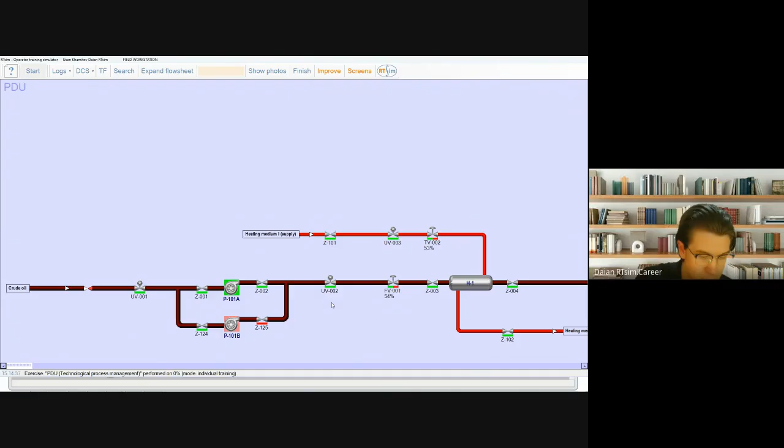On the main screen, the primary distillation unit, and the technological process management mode. As I said, in this simulator it's better to arrange these elements in a vertical direction. You can see that this simulator is really huge.

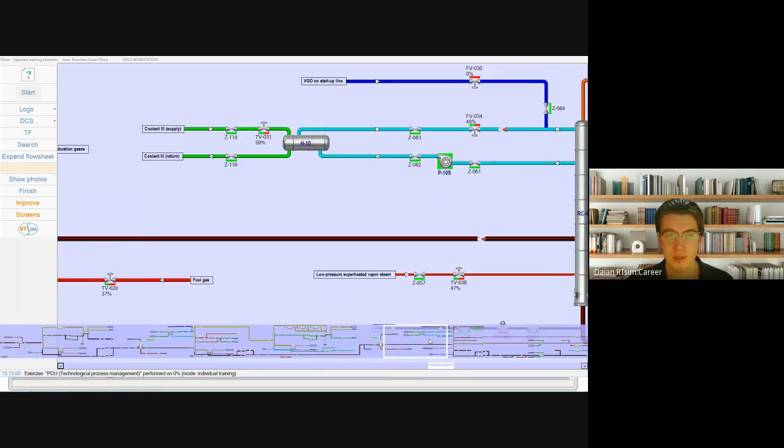This primary distillation unit is the first step of refining crude oil. The primary distillation unit is a facility for primary crude oil processing in oil refineries. It's commonly referred to as an atmospheric vacuum distillation unit with an electric desalting and dehydration block.

Why is it needed? This unit removes salts and water from crude oil and separates crude oil into fractions for further processing or for use as components in commercial production, and it's designed with several blocks.

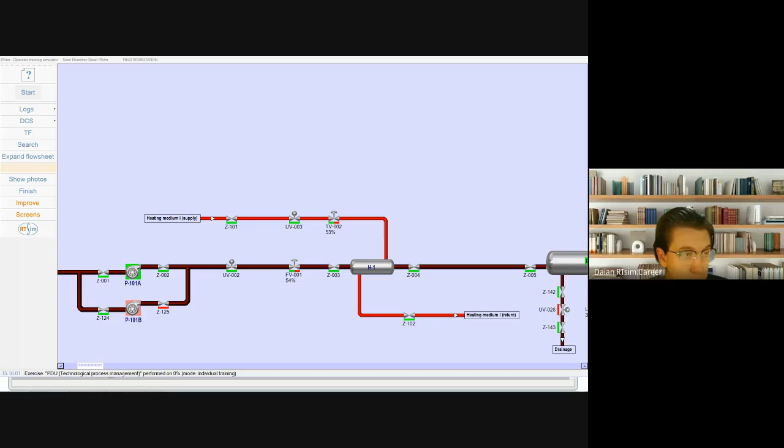Electric desalting unit, electric dehydrator, crude stabilization unit, rectification column, and vacuum distillation unit, furnaces, and the vacuum distillation unit. You can also see here a new type of refining unit: furnaces.

About this simulator: annual production is 1 million tons of crude oil. Daily production is about 3,000 tons per day, and hourly production is about 100 tons per hour.

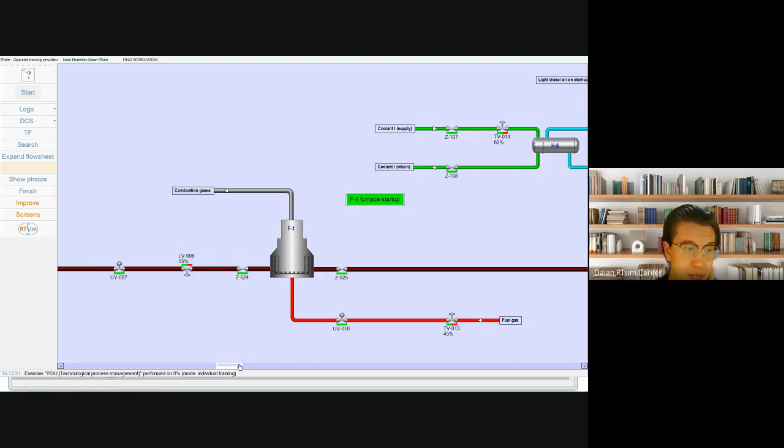What processes occur? Preheating of crude oil in a heat exchanger, crude oil stabilization, light ends removal, and main heating of stabilized crude oil in a fired heater, then atmospheric and vacuum distillation of crude oil, and obtaining key products: light product, heavy product, and heavy diesel oil, tar, and oil to recycle stream.

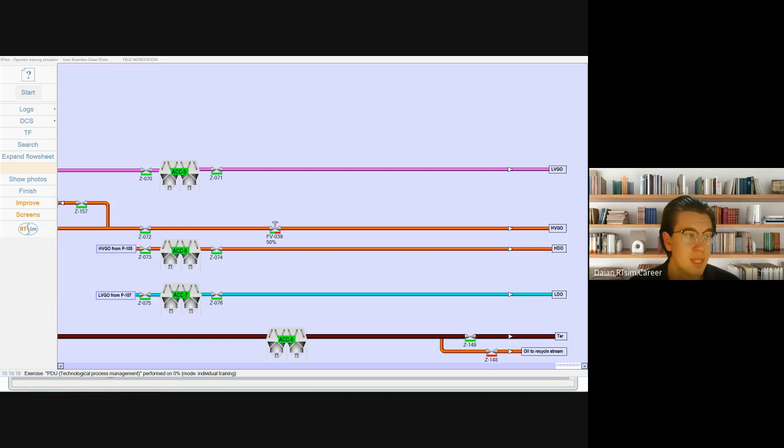Condensation and cooling of distillation product: crude oil is a complex mixture of hydrocarbons with different boiling points, and fractionation is a physical separation process that does not alter the chemical composition of the hydrocarbons. It consists of two main stages. First, crude oil is heated in heat exchangers and a fired heater, then fed to the atmospheric column, where it is separated by rectification, multiple stages of evaporation and condensation.

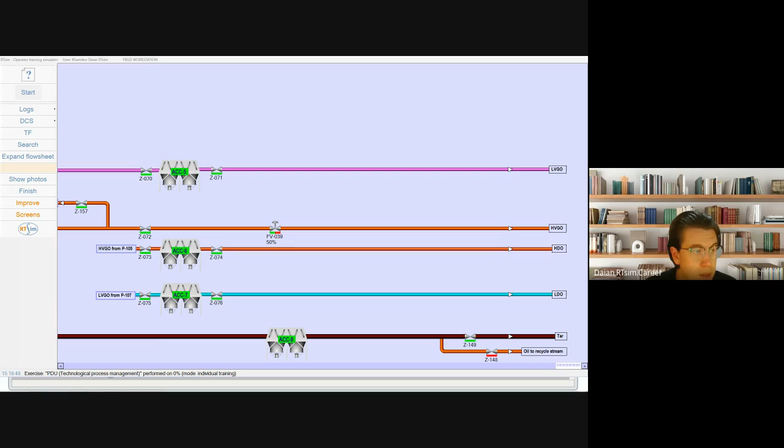Crude is heated in a heat exchanger and fired heater, then fed to the atmospheric column, where it is separated by rectification, multiple stages of evaporation and condensation, into fuel distillates such as gasoline, kerosene, diesel fuel, and atmospheric residue. The atmospheric residue is further processed in the vacuum column; pressure reduction is required to lower the boiling points of heavy components and to prevent thermal cracking of heavy hydrocarbons. This allows production of vacuum distillates, heavy diesel fuel, light and heavy vacuum gas oil, and ensures vacuum residue like bitumen. Thus the process ensures sequential separation of crude oil into target fractions through controlled adjustment of temperature and pressure.

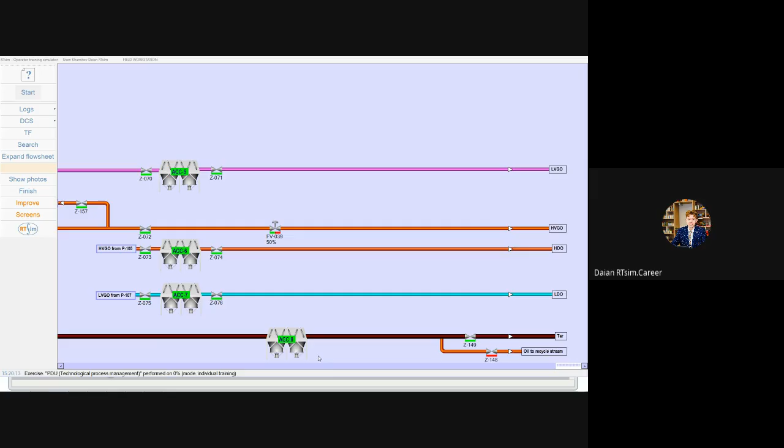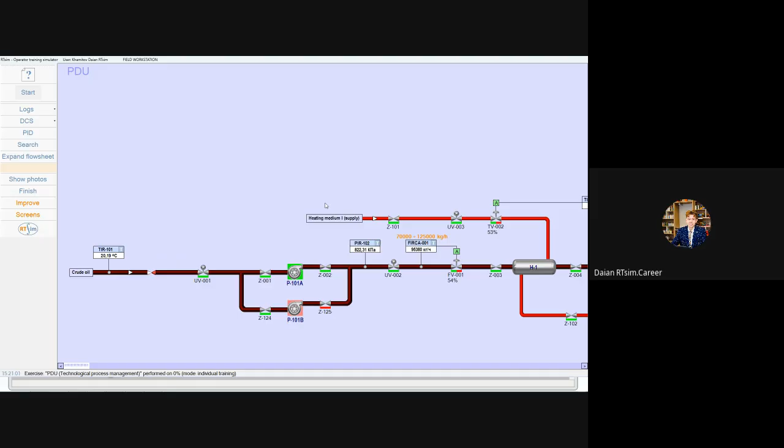Crude temperature and pressure at the pump discharge are recorded by instruments. To see all devices, click on TF mode, and you see that TIR-101 and PIR-102 are temperature and pressure devices that measure the parameters of crude oil. Crude mass flow rate is maintained by controller FIRCA-001 and control valve FV-001.

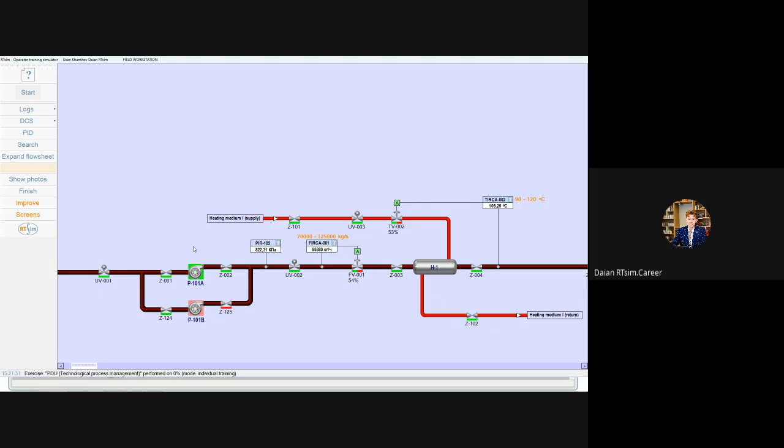After crude oil is heated in the heat exchanger, it is directed to the electrodehydrator, which is designed to remove water and salts from crude oil. Heated crude temperature is maintained by controller TIRCA-002 and the level device.

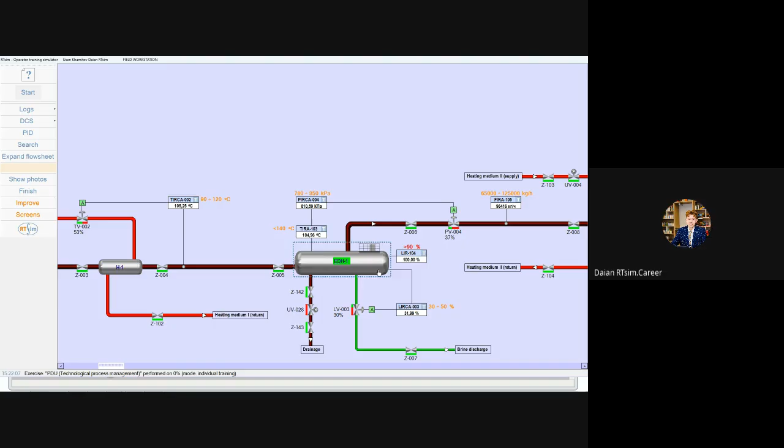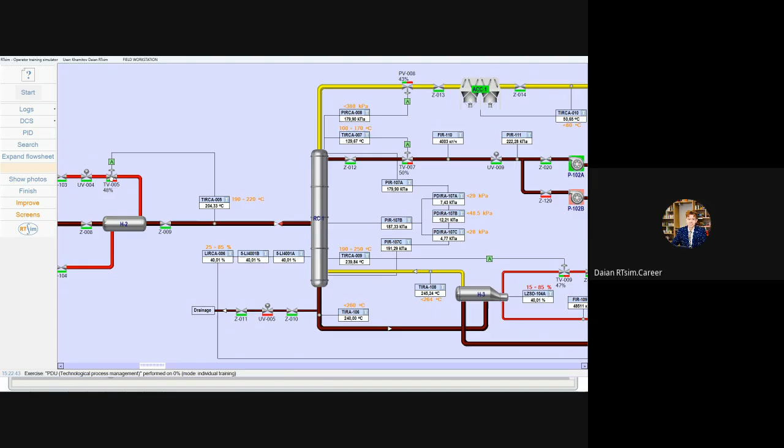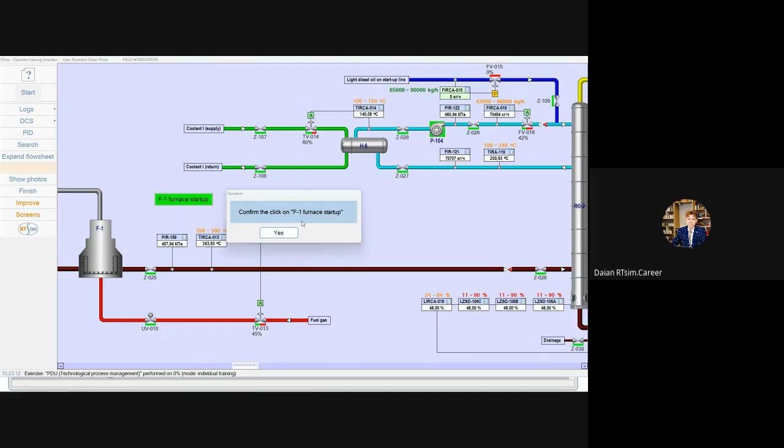The next unit is the crude stabilization unit after the second heat exchanger. Dehydrated and desalted crude oil passes through and is heated in a heat exchanger, the second heat exchanger, where temperature is maintained by controller TIRCA-005 and control valve TV-005.

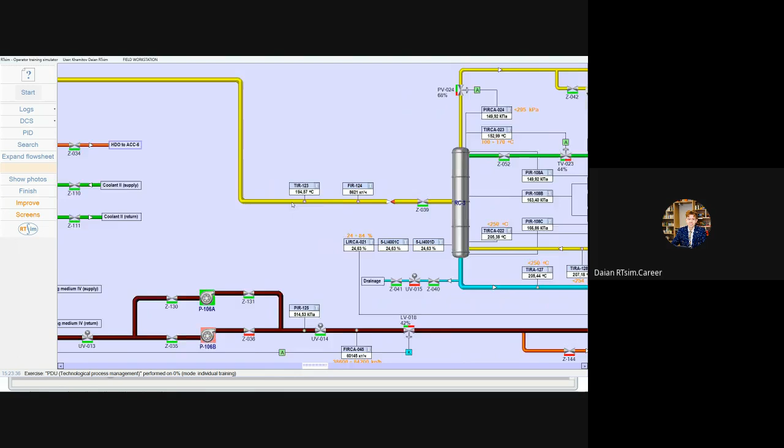Now let's get back to the first rectification column. After two heat exchangers and the electric dehydrator, crude oil is directed to the seventh feeding tray. All signalizing parameters you can see here.

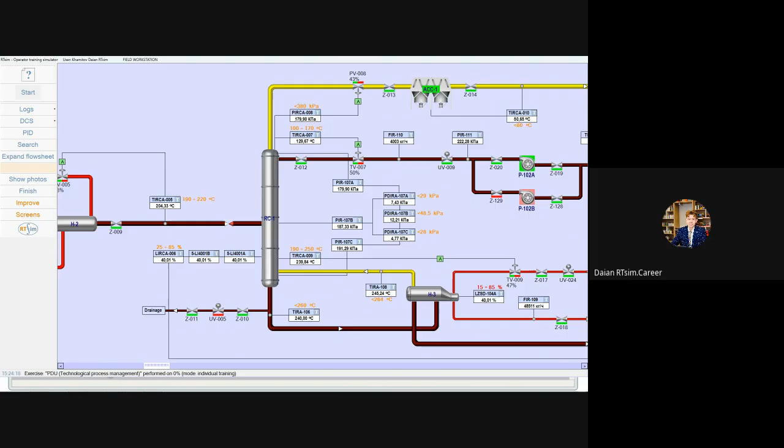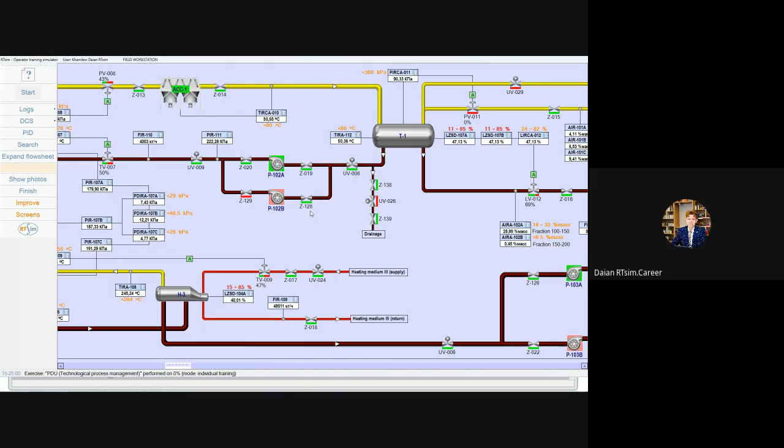Next block is the atmospheric distillation block. Stabilized crude passes through, is heated, and goes from the first rectification column to the second one. In the second column, which is bigger, the feeding tray is the seventh tray.

The first rectification column has differential pressure monitoring in the column. It's overall differential pressure.

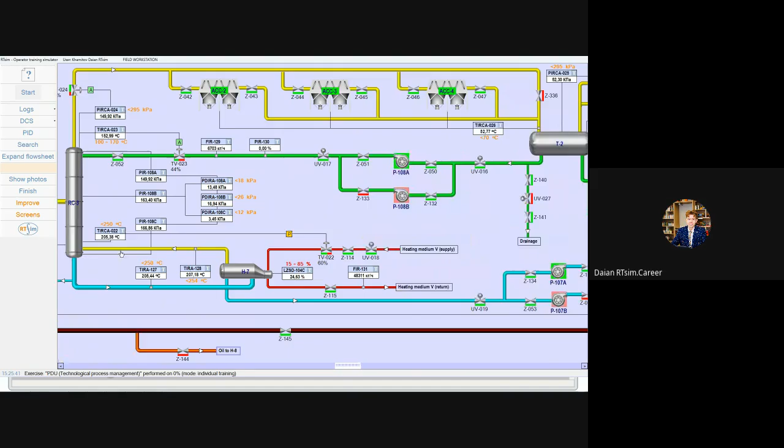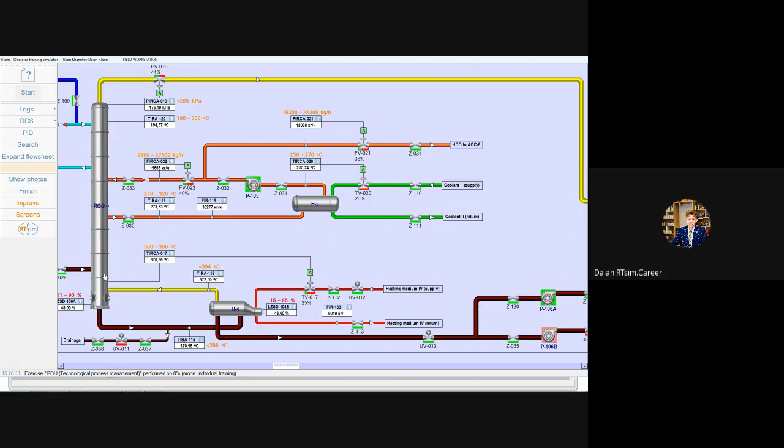Next block is the vacuum distillation block. Fuel oil, mazout, from the second rectification column passes through and is heated in the fired heater, then directed to the fourth rectification column. Then vacuum residue from the bottom of the rectification column is pumped as a product, to be fed to the gasoline heat exchanger.

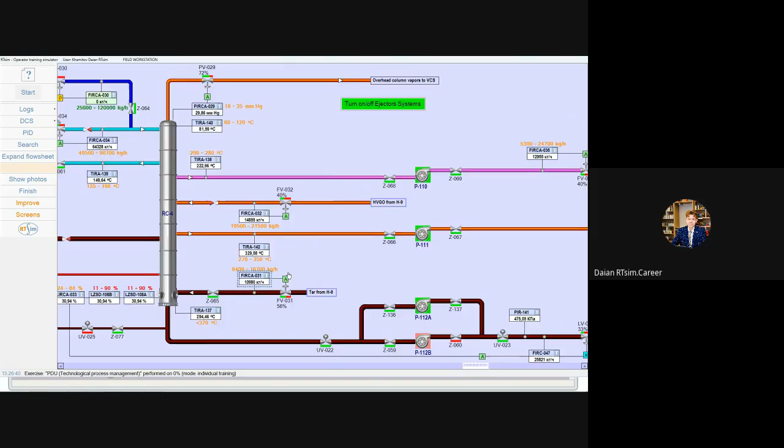So let's finish and see other scenarios of our primary distillation unit. You can see only atmospheric block startup, vacuum block startup, and the desalting block startup. Let's try to start it up.

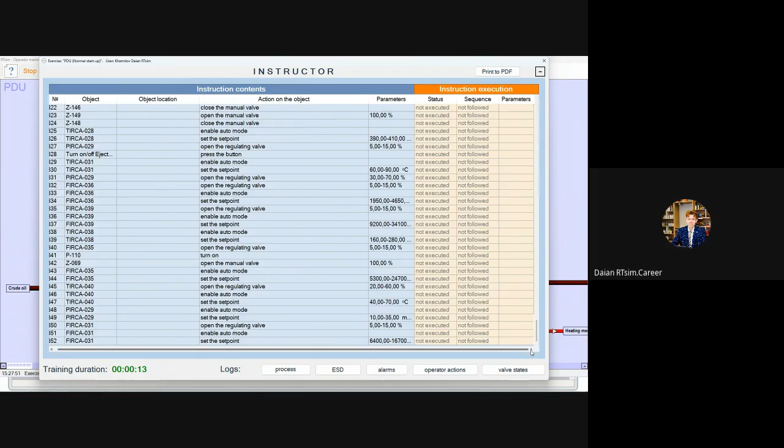Start, and let's open the instructor. You see here about 352 steps to write startup for this simulator.